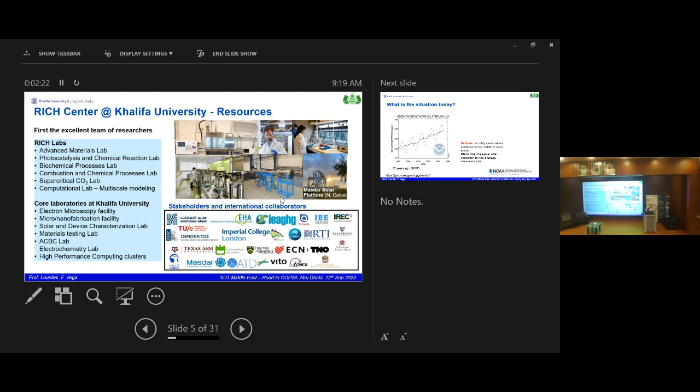In the center, we have labs that belong to the center that are actually in the building next to us over there. For next time, we can invite you to come. We also use the core labs of the university. We have some pictures of the labs that we have here, and these are some of our stakeholders and international collaborators.

This is not my last presentation. Is this the one I sent you? Okay, that's weird. I will do because I don't know what is coming. This is not the one I prepared yesterday. So let's see what we get. What is the situation today regarding - let's see if I have it later. No, really, it's not the last one. Anyway, doesn't matter, I managed with it.

Okay, so when we talk about revolutionizing the energy system, we talk about COP, we talk about all these things. In the end, what we are talking about is what do we do to mitigate climate change? One of the main issues is the bad boy of the movie, which is CO2. CO2 is not bad, it's just that we have an excess of CO2 in the atmosphere that we need to handle. So how is the situation today regarding CO2?

This is a slide that I present in all my talks, showing the CO2 concentration in the atmosphere over a period of 5 years. The red line is the monthly mean value centered in the middle of each month, and the black line is the average per season. This is always measured in Mauna Loa.

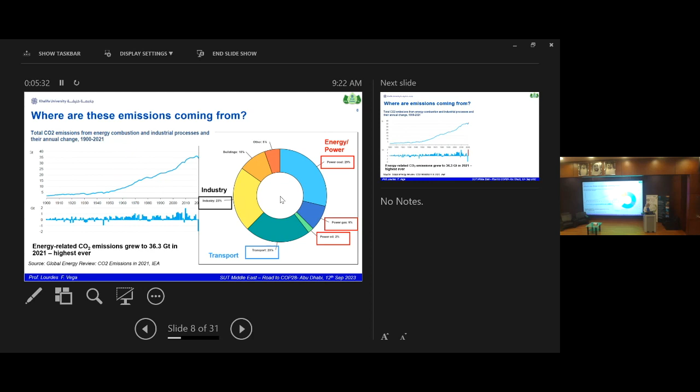You see, this is not my last slide. Anyway, that's fine.

So in the end, what we are going to talk about today and for the rest of the meeting is that we are on a planet in search of sustainable, secure, and affordable energy. This is the trilemma. We need to have this.

Maybe especially for the young people, you think that 2050 is too far away? It's not that far away. We will see that to arrive at this by 2050, there are things we need to do today, and essentially because we didn't do the things we had to do yesterday as well. So this is really very, very important.

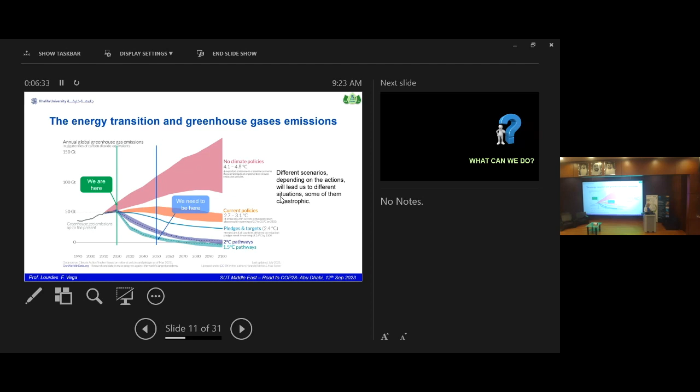So what can we do? I don't need to invent everything. Einstein already said, those who have the privilege to know have the duty to act. And this is our case. We all have this privilege. We don't need to invent any new thing.

The International Energy Agency published a beautiful report, and I'm giving you here the link, on the energy systems overview, that gives us different possibilities for tracking how we are doing. That's what I say, correct? Where are we today? Where do we need to be? Where have we been? Okay, so now I put these lines.

At least this is new from the one last week, but this is not my last version. Anyway, so what I'm going to show you here is, in all these different things, how are we doing with data, okay? So you don't have to go into the details of the data. What you have to do is look at the trends and see if we are arriving where we have to arrive.

And because I said 2050 is far away, let's look at 2030. 2030 is 7 years from now, almost 6 years from now. So let's see how we are doing.

So these are the contributions to the clean energy revolution. The first thing we need to do is energy efficiency. This is how we have been doing. The line shows the trend, and this is where we have to be in 2030 to reach what we have to reach by 2050.

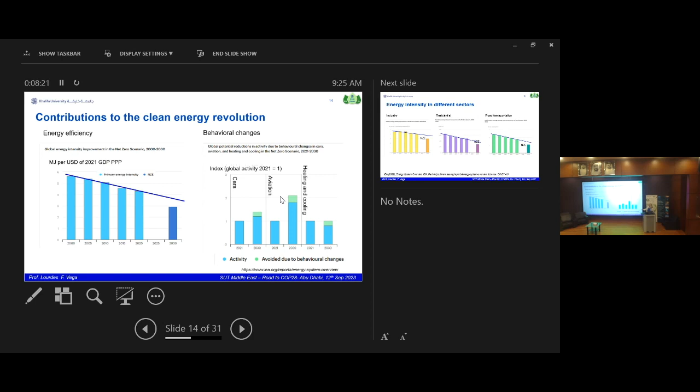I like the second one because it's in the hands of everyone: behavioral changes. Here we have three: cars, aviation, and heating and cooling. In blue you have the activities, and in green you have what is avoided due to behavioral changes. One means the activities in 2021. So we can see that it's actually growing, and the contribution from behavior is very small, to tell the truth.

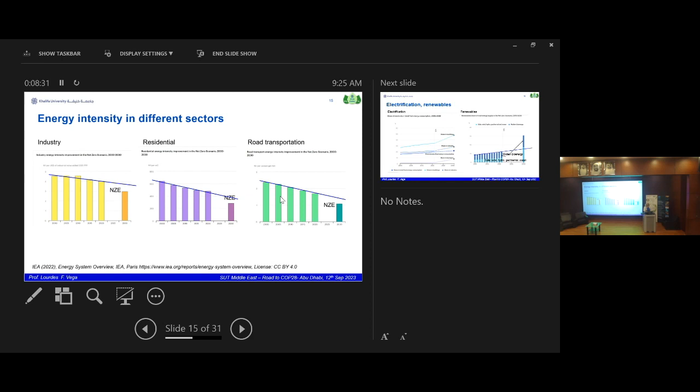Others, so we have here industry, residential, and road transportation. You have the lines, and you see that we are not hitting them. We are doing okay, it looks, but we are not hitting that.

Electrification and renewables, two of the topics we have today. In electrification, we are growing, of course, in buildings, also in industry, a little bit more in transportation.

On renewables, my God, this is the trend we have in renewables. We think we are investing in renewables. We need to invest much, much more. For this, we need to have more efficiency and also lower cost, of course, and energy management, as we will talk about later.

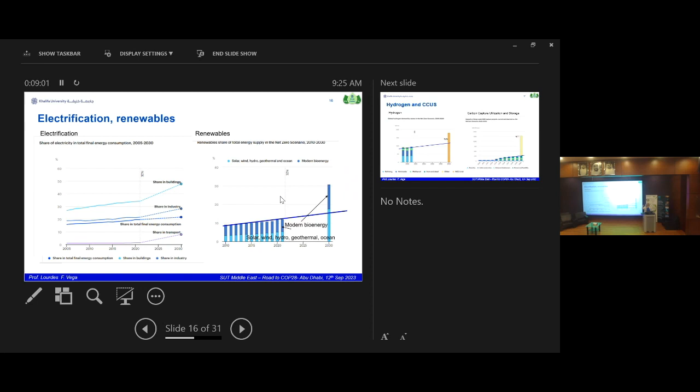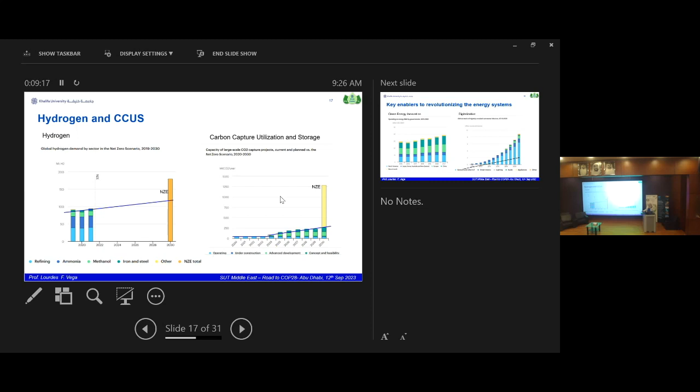How are we doing in hydrogen and CO2 capture, the ones that we work on at RICH? Not very good, as you can see. In CO2 capture, actually there are two trends. This is where we were until this year. This is the new trend, which is really growing, but we need to do much more to achieve net zero.

And then we have other systems like clean energy innovation. Digitalization is helping us a lot. But if I put traffic lights on this, no one is green today. Some of them are yellow, some of them are red. The ones in red are the ones we need to work on more.

That goes to the report by IRENA that gives us 6 technological avenues for the energy transition that will allow us to reduce emissions by 2050. These are renewables energies, 25%; efficiency, 25%; electrification, 20%; hydrogen, 10%; and the remaining 20% by CCUS from biomass or fossil fuels. So the topics we are addressing today in the workshop are all relevant to these 6 avenues that we need.

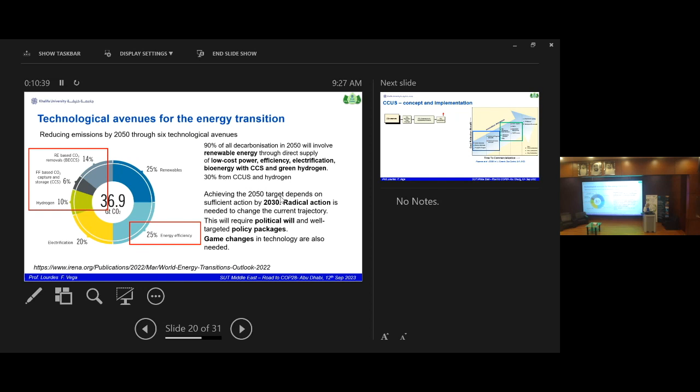It's clear that we need to work on low cost power, efficiency, electrification, bioenergy, hydrogen, etc. This means we need to take radical actions, as I showed you, and also requires political will to help. We have COP28 around the corner. We hope they come with commitments that we follow this path, and also technological changes. So the new people here, young generations, there is room for all of us to work on this.

If we talk about CCUS, this is distracting because I had another talk, but anyway, when we talk about CCUS, we are talking not only about capture, where we see different technologies that can help reduce the cost of CO2 capture and the time to commercialization. These are the ones we can do right now, but the cost reduction is very small. These are the ones we can work on, and the cost reduction is a little bit bigger. But in addition to CO2 capture, we also need to purify it, transport it, and store it, which is one of the talks we will also discuss today.

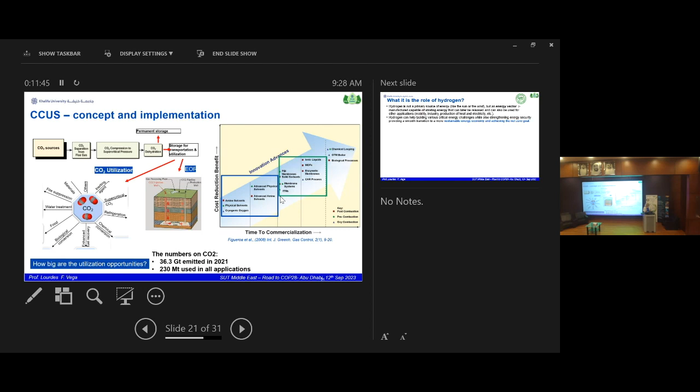But why don't we utilize it? It's much nicer. I wrote a book about this in 2010, and it's really much more attractive, but we have to be realistic. What are the numbers? I say the total CO2 emitted was 36.3 gigatons in 2021, and the applications, including enhanced oil recovery, was 230 megatons. So this is 0.6% of the total. So even if we work on it, we still have a long way to go, and we will need to store the CO2. And of course, we also need to work on renewables, energy efficiency, etc., to cover all the different things.

So where can hydrogen help? Hydrogen is not a primary source of energy like wind, that we will talk about later, or sun. So hydrogen, we need to produce it. It's called an energy vector. But the beauty of hydrogen is that it allows us to store energy. So it's a very nice combination when you have this with renewable energies. And in fact, this is the paradigm of hydrogen today. I have been working on hydrogen for 25 years. The hydrogen that we were working on was for transportation, for refineries, for fertilizers, how to improve the efficiency of the processes, etc. Now hydrogen can be used for other things as well in the context of clean energy. And this is the revolution.

So where can hydrogen help? Hydrogen can be used if we have an excess of renewable energy. Then we break the water molecule, we produce hydrogen and oxygen, and then we use this hydrogen when there is a deficit, when we don't have enough renewable energy, for example. And once we have the hydrogen, it can be used for many applications that we will see later: transportation, steel making, cement, etc.

How is hydrogen produced today? My students can answer this. Today, most hydrogen is produced by steam methane reforming. That means methane, a fossil fuel, plus water, and then we produce hydrogen and emit CO2 into the atmosphere. That's called gray hydrogen. 1 ton of hydrogen produces 10 tons of CO2. So that means it's a huge impact. And that's why we talk about blue hydrogen. But anyway, we are now working very hard on moving to other technologies that have a lower carbon footprint.

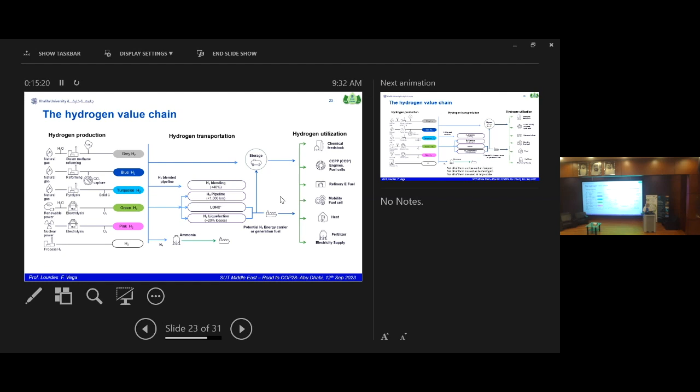Hydrogen is a very light molecule, so it requires a lot of energy and low temperature to transport it as a compressed liquid. We can also use hydrogen carriers or different options. We can convert the hydrogen into ammonia, transport the ammonia, and then crack it again to recover our hydrogen. Once we have the hydrogen, we can utilize it for classical applications like refinery, fertilizers, and chemicals for producing methanol, but also for other applications like energy storage, combined heat and power, and heavy transportation.

Not all these technologies are mature. Not all of them are low carbon - for example, gray hydrogen is not low carbon - and not all of them are used at large scale. That's why we need to move toward what we call the hydrogen economy.

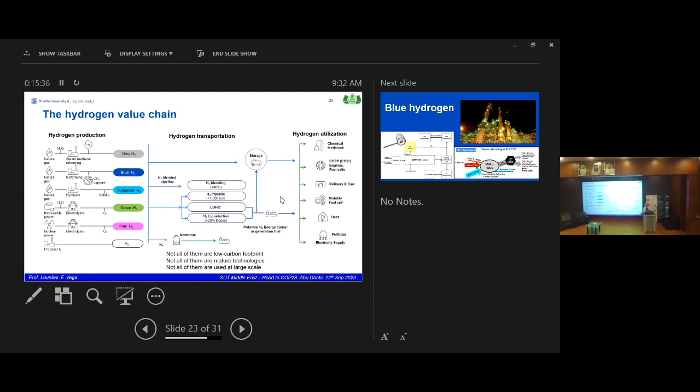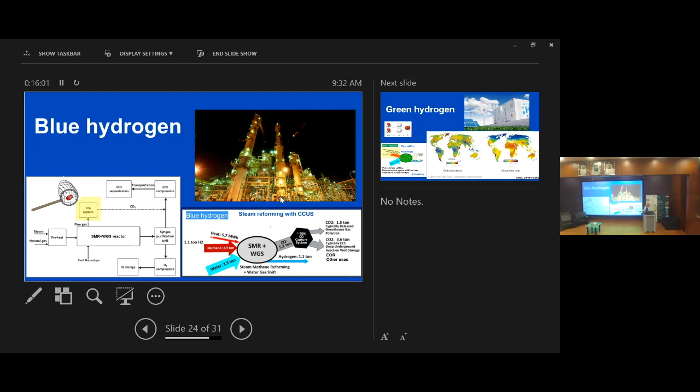So what is blue hydrogen? I already mentioned what blue hydrogen is. This is, for the engineers, a mass and energy balance on how to produce blue hydrogen. We have here the amount of heat, water, and methane we need, then the reaction, and then we get the hydrogen. This is all based on 1 ton of hydrogen, and this is the CO2 we recover. We don't put 100% because we are scaling over 1 ton of hydrogen. We can do the calculations in a different way.

What about green hydrogen? Green hydrogen is produced by electrolysis. It could be produced by other ways too, and it requires double the amount of water compared to blue hydrogen, and 5 to 7 times the amount of energy. So this is the problem - we require a lot of energy to produce hydrogen.

That means we need low cost renewables. We are in the right place for everything - we have oil and gas, we have sun, we have low cost solar, etc. This is very good, but again, solar is intermittent, so we need to see how we combine that.

We need fresh water - that could be an issue for the UAE. We don't have water, and we use the water for other needs. But still, we can work on going around all these issues and have very good opportunities for green hydrogen. That's why we have green and blue hydrogen.

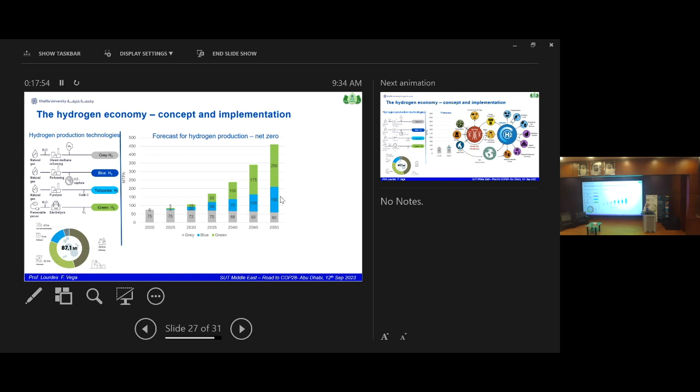And it's because of the applications we have. But we expect to see growth with new applications, especially heavy transportation and synthetic fuels, to decarbonize the hard-to-abate sectors like heavy transportation, including aviation and maritime, ammonia, metal production, and heat and power. This brings us to 2 main areas regarding CO2 that we have to work on.

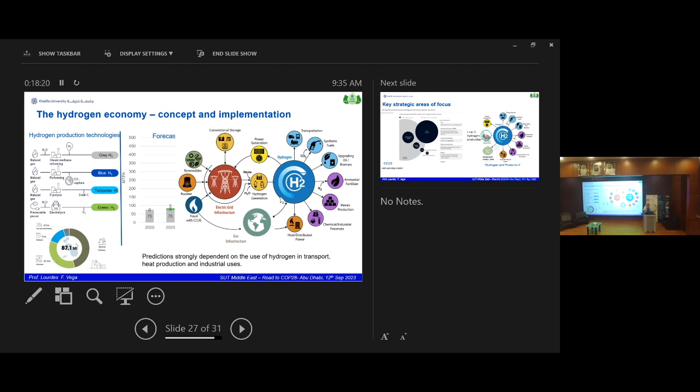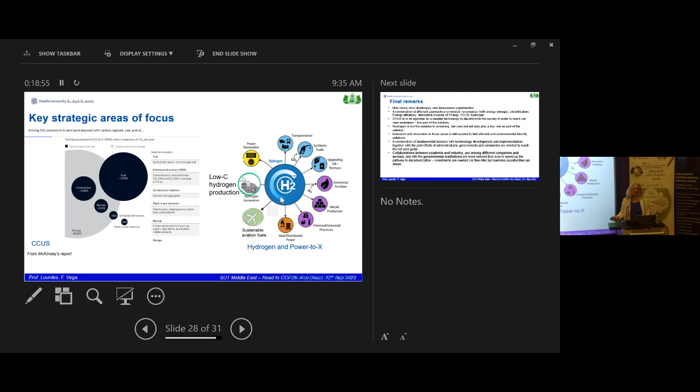For hydrogen, I already mentioned it. So, the final remarks: these are new times, new challenges, and new business opportunities for all of us. This is a challenge, but it's really an opportunity - an opportunity for developing new technologies, and an opportunity for taking old technologies and putting them into different applications, working with the final users and with universities.

So we need, for sure, different combinations. We need to have renewables with energy storage. We need to have electrification. We need to have energy efficiency and alternative sources of energy.

I didn't talk about waste to energy. This is very important. Bioenergy, including waste, is one of the main areas in which we are moving for producing electricity and power. Research and innovation is clearly needed. We need to find more efficient processes, environmentally friendly and affordable. We need to combine fundamental science with technology development and implementation.

Let me give you some numbers. The breakthroughs will come from fundamental science, and that's why we need to collaborate, all of us together. So joint efforts with administrations, governments, and companies—we need to work together, but believe me, we need to invest. There is no free ride. What we invest today will show up in the future. And the future is here.

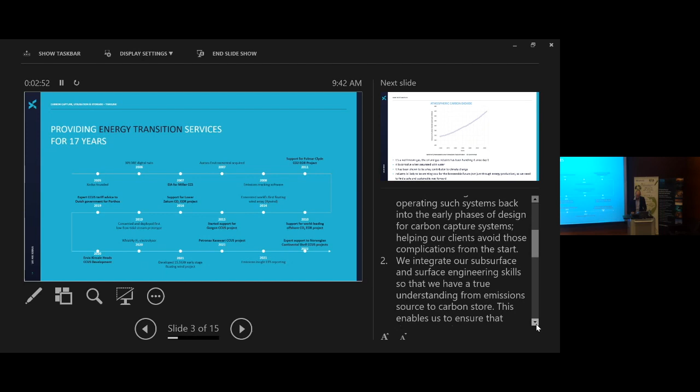So I'll give you a little context. We've been doing this for many years, over a decade. We did our first CCUS project in 2011. Xodus is one of a limited number of companies globally with experience actually operating industrial scale CCUS storage systems. This has allowed us to bring lessons learned from the early days into the early phase design of the projects we're now looking at, which is super important for making these projects more successful and, more importantly, economic.

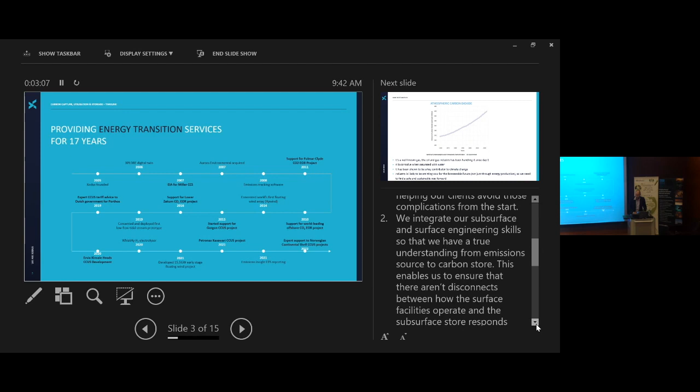We've got that integrated subsurface and surface approach, and I'll touch on that later. One of the biggest challenges we have in the CCUS space is around the uncertainty and monitoring of what happens to that CO2 when we inject it into a store.

So what is CO2? Firstly, it's nothing new. It's a gas we've been dealing with in the upstream industry since day one, so we've got a pretty good understanding of it. It's corrosive when saturated with water, which is an issue in an underwater scenario, but as we'll find out, there are solutions.

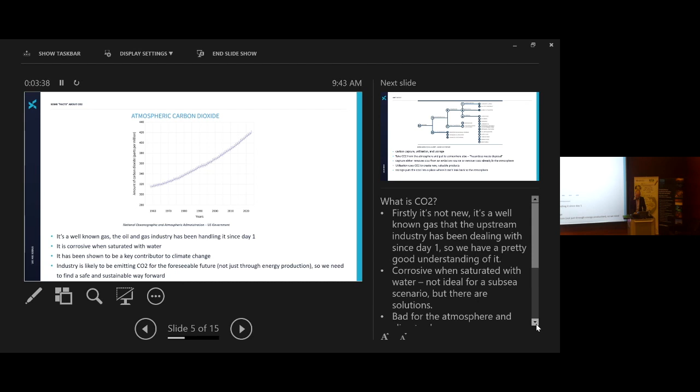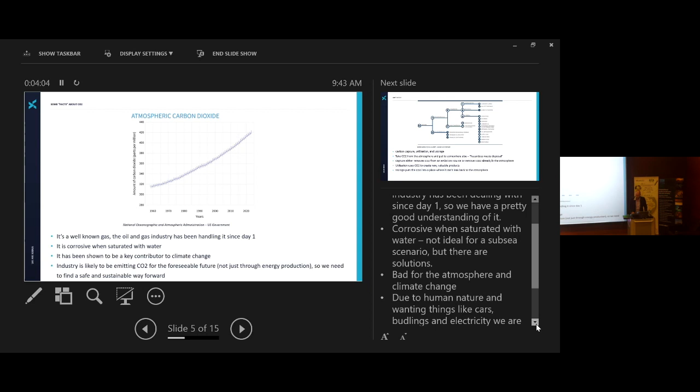It's pretty clear that CO2 is bad for the atmosphere, that's a well-known fact. Due to human nature and the things we want and need in terms of energy and infrastructure, we're going to be producing CO2 for the foreseeable future. So we really need to find a way to sustainably continue to develop, but dispose of this nasty gas appropriately and economically.

For those not familiar with CCUS, I'll give a very brief overview. It's pretty self-explanatory: taking CO2 from the atmosphere and putting it somewhere else where it doesn't escape. Another name we could have given it is hazardous waste disposal, but that doesn't have such a good ring to it when you're trying to get investment.

The capturing refers to collecting the CO2 at atmosphere, or from the atmosphere, or directly from an emission source. Utilizing simply means using that captured CO2 to create more valuable products, such as fertilizers and other useful chemicals. And storage does what it says on the tin, putting it somewhere where it hopefully stays for good.

Now I wanted to give a bit of context as to why CCS is important. Professor Vega touched on a lot of these numbers, and I hope they match up fairly closely to hers. But for starters, CCUS/CCS is widely considered to have quite a large impact in arresting the current emissions position, so it's quite important for the climate change situation we're in.

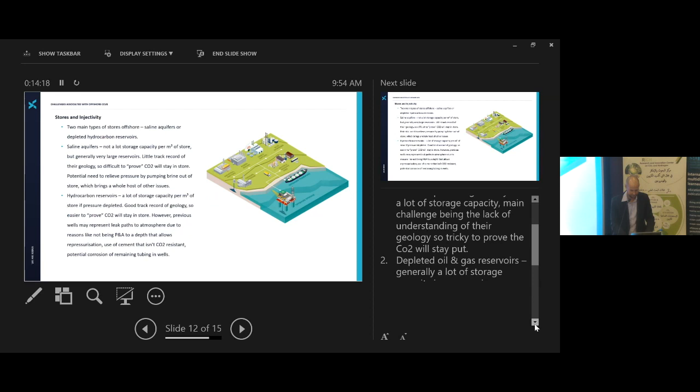In terms of the stores and the injectivity, the stores remain the same, whether it's onshore or offshore. We've generally got two types of store in the CO2 storage space, and that is saline aquifers, which generally have a lot of storage capacity, but the main challenge is the lack of understanding of their geology. And that makes it tricky to prove that the CO2 will stay where we put it.

The other option is depleted oil and gas reservoirs. Generally these have got a lot of storage capacity when the reservoir is pressure depleted. And we understand the subsurface elements of these reservoirs in much more detail because we've been producing oil and gas out of them for some time now. However, with existing reservoirs, we have the problem of existing wells and infrastructure presenting potential leak paths, and that makes the whole operation all the more tricky, especially when you have a field where previous operations haven't taken into consideration using CO2 resistant cement, for instance, or the poor plugging and abandonment of previous wells.

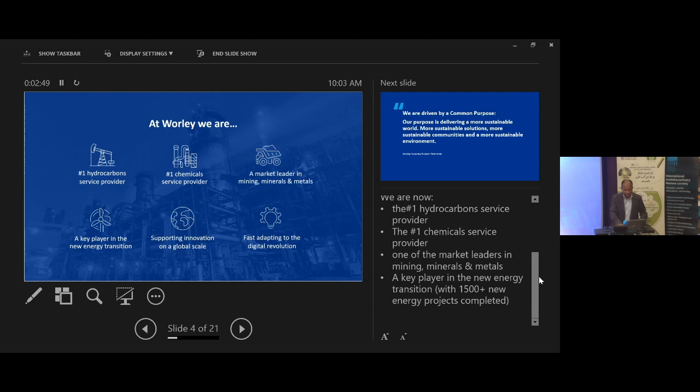Just a quick introduction to who we are. Worley is a leading engineering consultant. We do early stage feasibility studies right through to front-end engineering design, all the way through to EPCM models - engineering, procurement, construction, management type models. We're number one in hydrocarbon services, in chemical services, and we're also doing a lot of work in renewable energy, with over 1,500 projects completed to date. We're driven by a common purpose: delivering a more sustainable world, more sustainable solutions, more sustainable communities, and a more sustainable environment. Something else we're really proud of - we have over 50,000 people across 49 countries, spread across 250 locations, so there's always a person with the right skills and experience to speak to.

So just an overview of offshore wind. This is a quote from the International Energy Agency Director, Mr. Fatih Birol. He says that offshore wind's potential is near limitless - improved technology and steep cost reductions are putting more and more of that potential within our reach. We believe that the need for affordable low carbon technology is greater than ever, and offshore wind is definitely one of the tools. It's been identified as one of the big three in energy scenarios, projected alongside onshore wind and solar PV to be one of the main sources of electricity in the global energy transition. Like onshore wind and solar, it's a form of renewable energy that's clean, cheap, and reliable.

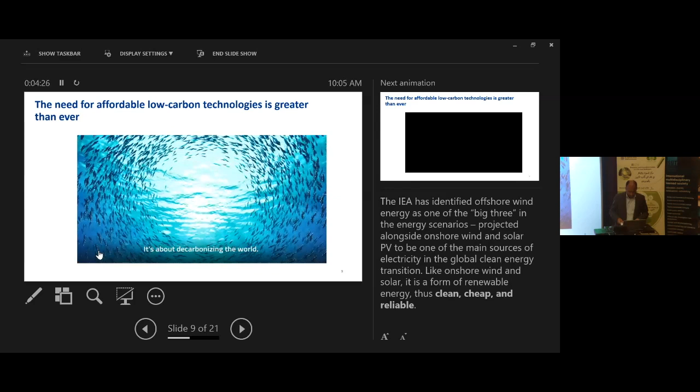It's not just about powering the grid, it's about decarbonizing the world. Everyone has an ethical decision to make about the source of their energy, and the biggest changes can only come from within. Companies that work in carbon-intensive industries have a responsibility to lead the way in building a net zero future. And the race is on to get more offshore wind farms up and running safely.

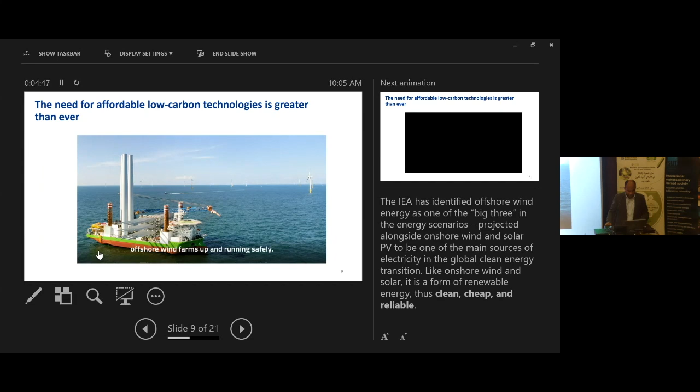As wind markets emerge in new geographies, the industry depends on a workforce who are on the ground and ready to go. Experts who understand the problems and can build cost-competitive business cases to get the fixed and floating turbines energized on time.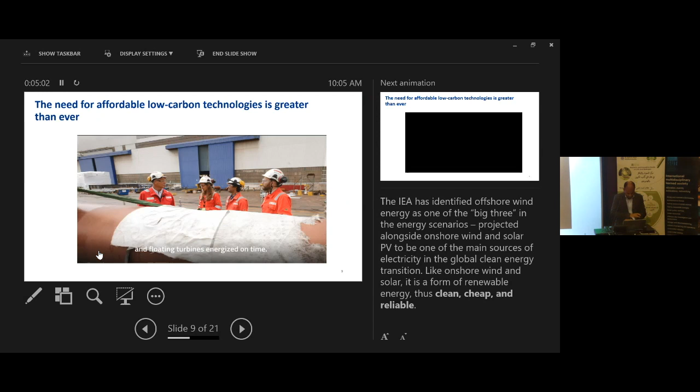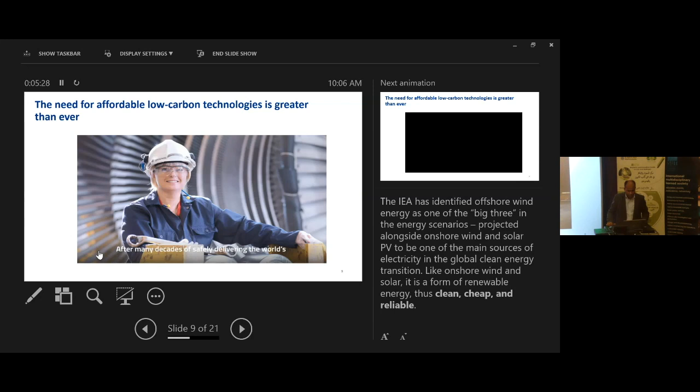But it all means nothing if the turbines don't spin. It's about applying the right digital tools and finding smarter ways to operate and maintain assets. But using offshore wind to produce electrons is only the beginning. Piecing together all the parts of the renewable energy puzzle to integrate into your operations is complex. After many decades of safely delivering the world's largest projects, for us, it's business as usual. The time is now.

So, as I said, we believe that offshore wind across the globe is one of the toolkits as part of the energy transition. The ocean winds are an inexhaustible source of renewable energy. According to the IEA, offshore wind energy could power every home and business on Earth. However, most of this potential of wind power is currently going to waste. The only way to capture it is with tens of thousands more offshore wind turbines spinning on coastlines across every continent. The world's net zero ambitions depend on making this a reality.

Produced by wind turbines installed typically in shallow waters of less than 50 meters deep, offshore wind farms are usually located in nearshore locations. Currently there's also floating wind, which is challenging the evolution of wind farms by allowing turbines to be installed much further out, benefiting from even more reliable and consistent energy.

Coastal winds - just a brief background on how energy is generated. Coastal winds help to turn wind turbine blades, spinning a shaft connected to a generator. This generator turns the kinetic energy into electricity, which is sent to substations and fed into the electricity grid or distributed to industrial users.

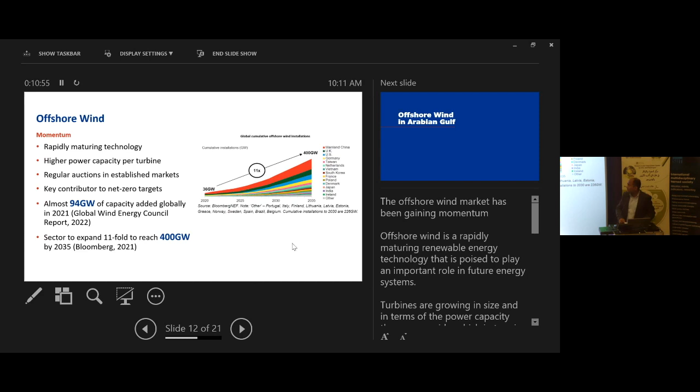In 2021, global commissioning of wind turbines reached almost 100 gigawatts for a second year running, and offshore wind additions surged almost 161% year on year. This chart shows Bloomberg's 2021 offshore wind market outlook, which foresees the sector to expand almost 11-fold to reach 400 gigawatts by 2035.

Now I'll focus more on the offshore wind potential within the Arabian Gulf market. These charts show the potential of offshore wind in the region. According to some estimates, the Arabian Gulf and the Gulf of Oman's shallow areas have an estimated 1,000 gigawatts of offshore wind energy potential, which could considerably help the region meet its renewable energy goals.

The potential of offshore wind has been investigated and studied by several countries already. For instance, the UAE is conducting feasibility studies, and I believe Saudi Arabia already has plans to construct their first offshore wind farm.

The chart on the left shows the average wind speeds in the region, and the chart on the right shows approximately wind power density. The darker areas show higher wind speeds and higher power density. These charts are from the Kuwait Institute for Scientific Research. We can see that the offshore fields just to the east of Saudi's eastern seaboard and north of Qatar have the most potential for further studies and evaluation.

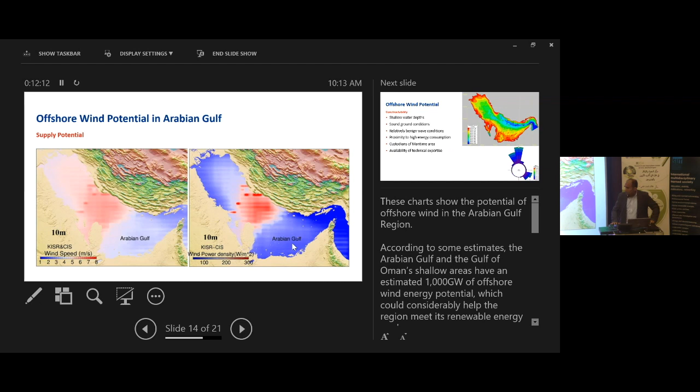In terms of constructability, here's really the advantage that the Middle East particularly has. The cost of construction of offshore wind farms is significantly driven by seabed depths, which in the Arabian Gulf region, as seen in the chart on the top right, immediately east of Saudi's eastern seaboard and north of Qatar, the nearshore water depths are typically in the range of 0 to 20 meters, and closer to shore, they range from 0 to 10 meters.

In addition, based on offshore work already undertaken for various oil and gas related projects in this region, we have a fairly good understanding of the generally favorable ground conditions, and therefore have a suite of suitable, cost-efficient foundation system solutions, which is a key driver for the overall cost of offshore wind farms.

Furthermore, in the bottom right, we can see typical wave roses for the area just off the eastern coast of Saudi Arabia. The wave conditions are relatively benign compared to some other regions, for example the North Atlantic, further simplifying the design and construction of offshore wind farms here.

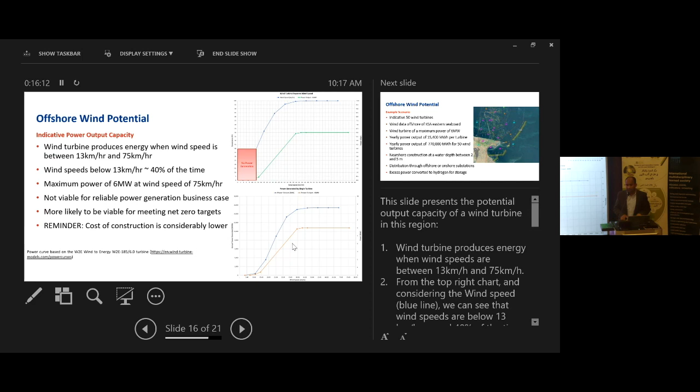So I'll give a brief example scenario of where this offshore wind could potentially be employed. This slide presents a potential example of 50 wind turbines located offshore Saudi's eastern seaboard, close to an operating oil and gas field that is a fairly high energy consumer.

It has been assumed that 50 wind turbines would have a maximum power rating of 6 megawatts, with a yearly output of 15,400 megawatt hours per single turbine and 770,000 megawatt hours for all 50 wind turbines.

The wind farm is located at nearshore depths of around 2 to 5 meters, in fairly sheltered metocean conditions. These wind farms could be constructed on dredged platforms to further reduce the cost of nearshore piling construction. The power could be distributed through offshore or onshore substations, depending on consumer requirements. Although not considered for the economic case, excess power could be stored and converted to hydrogen if required.

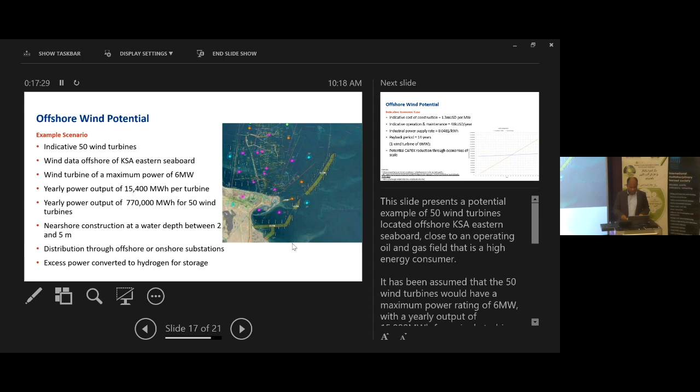This slide provides an indicative economic case for such an offshore wind farm in this region. An indicative capital expenditure cost of around 1.3 million US dollars per megawatt has been assumed, with a continuing OPEX cost of around 50,000 US dollars per year. An approximate power supply rate has been assumed based on current prices in Saudi Arabia.

Based on this analysis, as you can see from the chart on the right, the straight payback period is approximately 14 years. Please note this is a simple assessment, not considering any discounting of cash flows, equity/debt considerations, or complex financial modeling. Although there's potential for CAPEX reduction through economies of scale or lowering overall costs, the simple payback is not going to be economically exciting for anybody.

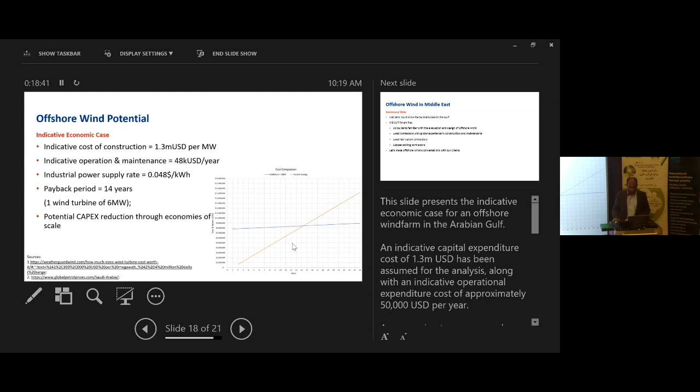However, as mentioned previously, the key here is not the economic case, but the overall objective of meeting net zero targets for the region. Offshore wind, as I said at the start, is one of the tools that can contribute to this.

So just to finish off, in summary, we've been easily dismissive of the case for offshore wind in the past, in the specific context of the Arabian Gulf region, and for very valid reasons too, some of which I've discussed.

However, net zero could drive the dynamic in some specific locations in the Gulf, specifically considering the relatively low cost in shallow nearshore and benign metocean conditions, located close to high energy consumption centers. There's the additional benefit of consultants, contractors, fabrication contractors, and subsea cabling contractors already present in the region, who have extensive understanding and experience built up over many years to develop very cost-effective solutions.

Therefore, it's an onus on all of us, when we engage with our clients, to make this part of our discussions and discuss the potential of offshore wind regularly in our conversations with them. Thank you very much, and I'll look forward to receiving your comments or any questions you might have later. Thank you.

Thank you so much, Yasser. I think what I can say is that I personally know some of the projects being conceptualized today in the Middle East region for offshore wind, so yes, it validates whatever you have shown in your slides. Thank you so much.

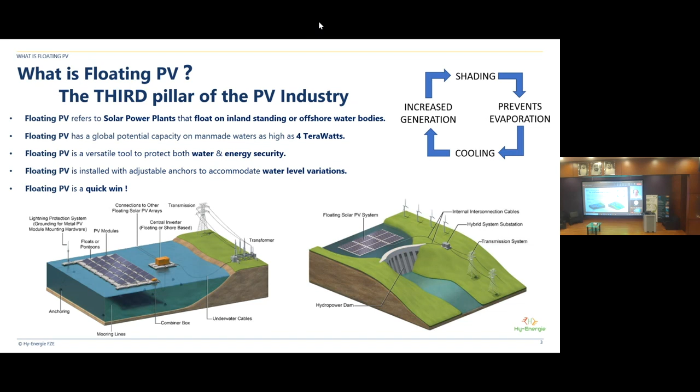I'd like to draw your attention to that engine I've put up on the top right, where floating PV systems provide shading to water, which prevents evaporation. It gives cooling to the panels, which in the Middle East is one of the major loss factors of solar, and that then reaches increased generation of the solar system.

So what does the market look like? There was a market study by IHS Markit in 2022 which forecast that the floating market would reach close to 14 gigawatts by 2026, mainly dominated by Southeast Asian countries, as you can see in the graph on the right. If you take the top 5 countries, 75% of what is being built or planned is happening in India, Indonesia, South Korea, China, and Vietnam.

It's also important to segment floating PV, you cannot put everything under one banner. On the left you see 4 segments which work at different degrees of difficulty. The easiest and currently most common way to build, in countries like Japan, Europe, and the US, is on ponds and lakes where you have very little wave action and not too much wind interaction. So it's easy and straightforward to build, not a very deep anchoring system is required, you can even anchor from shore.

A second segment is reservoirs, where you could face up to 2-meter wave height—think hydro dam reservoirs and so on. A third is near-shore areas, maybe a sheltered bay or a dock in a harbor sheltered from the ocean or sea waves. Then the fourth level, which is very new—and I'll come to that at the end of my presentation—is when you really go offshore, where you have full exposure to the elements: salt, mist, wind, ocean storms. That's the most difficult segment to address.

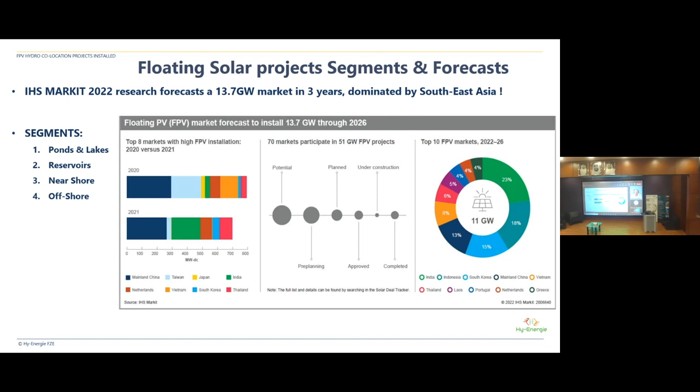Solar systems installed, floating PV systems installed—I'll show you some pictures of that. Currently we are over 5 gigawatts of floating PV systems installed worldwide, and it's growing very fast.

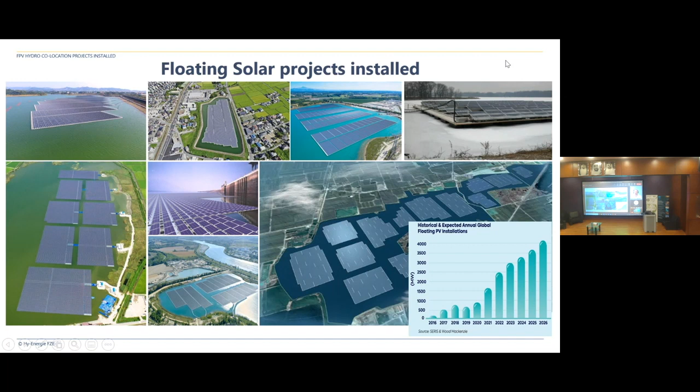Here you see more views, sheltered in a harbor, and on the top right, even in Canada, where you have freezing conditions, floating PV systems can be deployed.

So what are the advantages of floating PV systems? There are quite a lot, but the main ones are: first, you have a dual utility of the surface area, so underutilized water areas and existing infrastructure get used twice—you can use the water for irrigation ponds and at the same time generate electricity from it. Second, as I mentioned, it prevents evaporation of finite water resources, something we should really value in the MENA region because our evaporation can reach very high levels.

Third, we do not use valuable land, which can be used for other applications like real estate development or agriculture. Fourth, maybe surprising but something we should value in the Middle East, is that one of our biggest losses is the loss of performance due to heat.

However, if we can build floating PV systems over water, the cooling effect of the water can increase the performance up to 16%. That's something investors would probably value, even though floating PV systems have a slightly higher capex cost than ground mount systems.

It also reduces soiling, because working over water means less impact of soiling, so the cleaning cycles can be extended. That's actually the second largest loss factor of solar systems in the Middle East, the loss of yield due to soiling. It also prevents the growth of algae, so water quality is higher, and provides shade for fish. As I mentioned earlier, it's quite fast to deploy, faster than working on a ground mount surface.

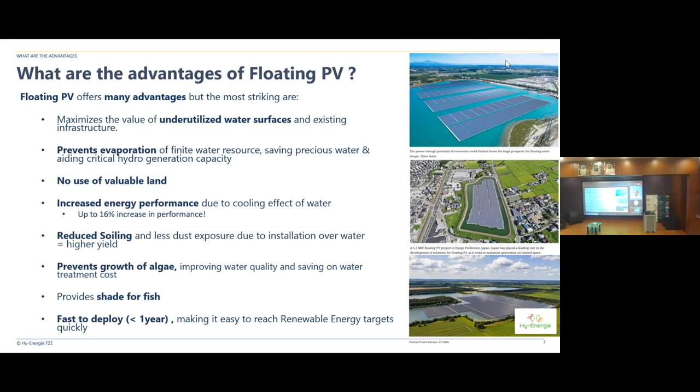I'd like to draw attention to this co-location of floating PV and hydropower. For me, this is really a no-brainer. Most of the advantages are the same as I mentioned before, but there are two I'd like to put in the limelight.

One being that if you combine a floating PV system on an existing hydro dam with existing infrastructure, you can generate your electrical requirements during the day from the solar system, basically delaying your dispatch of water until nighttime, shifting your use of water and creating a virtual battery. This resolves one of the big issues we face in the renewable world: how do we get low-cost storage? By putting floating PV combined with hydro, we have that low-cost storage.

Hydro dams also have a function in drought protection, done through management of the water. If we add floating PV, you have an additional dial for how to control that factor, which is something very much valued by municipalities.

If municipalities or governments engage in PPAs or public-private partnerships, such systems can be built at low cost. There's basically no capex; the system basically pays for itself by doing this.

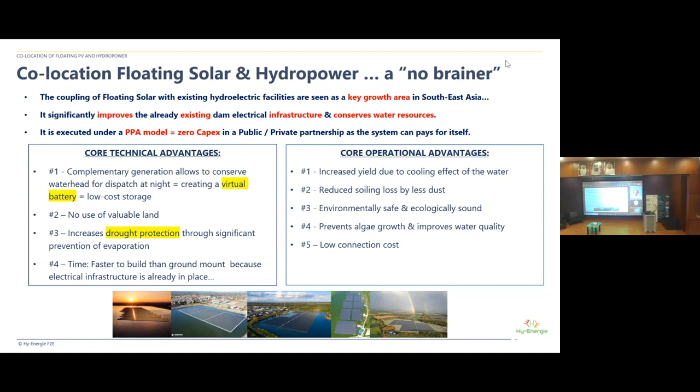Again, we see Southeast Asia as a leading area. Thailand has a large program converting quite a lot of their hydro plants to co-located systems. Here you see a list of some of these large systems. China, of course, is leading, although they did not build it as a floating system, but as a combination of fixed ground mount with a hydro setup to try out this technology. The largest one we see here is in India, the Omkareshwar reservoir, where 600 megawatts of floating is currently installed.

I also mentioned Portugal, a leading country in Europe for deploying this technology. My current employer, Masdar, has commissioned 145 megawatts in Indonesia. And then you see other large systems coming up.

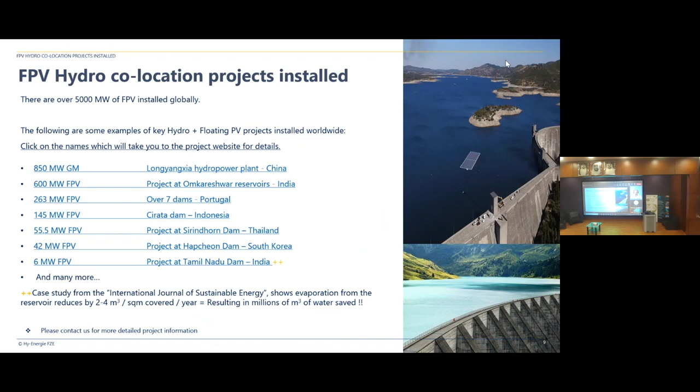Concerning the Middle East, we did a study ranking which countries would benefit most from this technology, based on priority criteria: high GHI, meaning solar irradiance hitting the surface of the Earth; whether hydropower with a reservoir is available; whether land price is high, often a big driver for floating; whether there's water saving potential; a large population; whether solar is already ingrained in the country's psyche so it doesn't need much explaining; whether funding is available, and so on.

We came to this ranking you can see on the left—our ranking, of course, open for debate—but we put Turkey in the number one spot, then Morocco, Iran, KSA, Egypt, UAE, Israel, Iraq, and so on. Again I allude to this little engine, what I call the floating PV engine, where shading prevents evaporation, provides cooling, and increases generation. It's a nice engine where working with nature instead of against it actually brings additional benefits.

Now let's look into a couple of country profiles. We've taken Iraq here—this is a country study for Iraq on floating PV. It only ranked number 8 on our list, but if you look into detail at Iraq, you'll find they have 37 dams in the country, 5 of which are major hydroelectric power stations with almost 2.4 gigawatts of generation capacity.

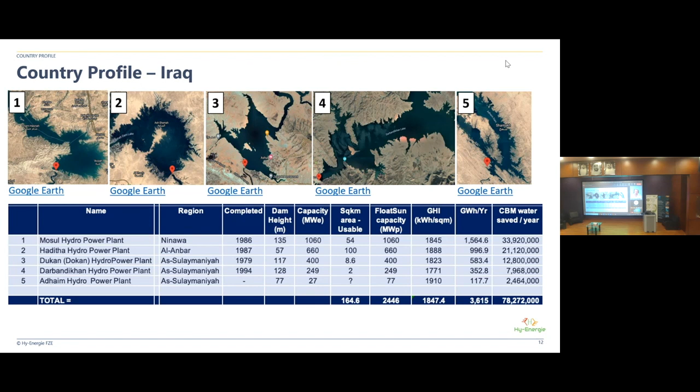Here you see a picture of those dams. Often they are very large water bodies, 20, 30, 40 square kilometers of area. So the floating system that is installed would not even take that much space from that water body.

The second study we've done is for the country of Morocco. Morocco is a country with quite a lot of dams, over 139 dams and an additional 57 under construction. They have a major issue on water scarcity also, because the groundwaters that are being pumped out for irrigation for the agriculture are not getting replenished.

So there is quite some loss from those dams, which amounts to 70 million cubic meters per year. As I mentioned, we could avoid that by deploying floating PV systems.

However, if we study the top 5 dams, a total of 1.2 gigawatts of solar can be achieved, reaching almost 2 terawatt hours of electricity, and would save 38 million cubic meters of water from evaporation. As you can see, that's almost half of what is currently being lost from evaporation, just by covering areas of those dams with floating PV.

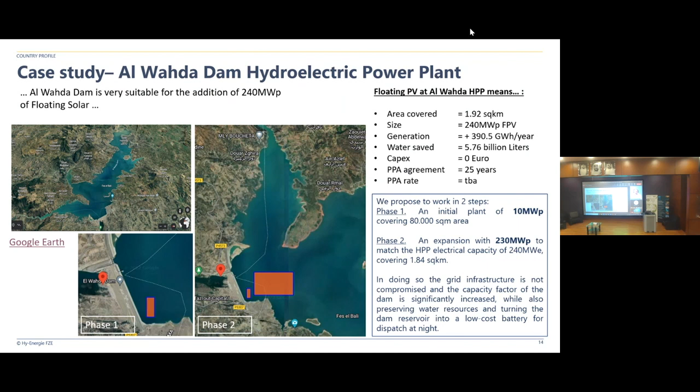Here is a picture. As you can see, this dam's reservoir is covering a massive area. On the bottom left, phase 1, you see a 10 megawatt pilot built close to the dam, close to existing infrastructure, so with low connection cost. And in phase 2, if you would extend that with 230 megawatts, you can see the area it takes from the reservoir surface is really not that much. It's basically also providing this dam with additional storage capacity for dispatching power to the surrounding areas.

Good, now let's dive into this 4th segment, what I mentioned, when you go really offshore. There's a company in Holland, the Netherlands, called SolarDuck, quite innovative and recently formed as a spin-off from a shipyard, which is focusing on pure offshore floating systems.

And this is, of course, fueled by the strong macro trends that we've seen, the growth of renewable energy power demand, the fact that solar is critical to meet this increased demand, because of course we're building a lot of solar, but also the demand is increasing almost faster than the rate at which we can build it.

IEA had made a study showing that if you want to be on track by 2050, we would need annual capacities of solar to reach 630 gigawatts by 2030. Currently, we're close to 200 gigawatts per year being built, so still a factor of 3 to be increased.

It was also brought up by one of the previous speakers that most of the population is in coastal areas, which is helping the development of floating PV, offshore PV. Floating is offering this new frontier, basically creating a new asset class that can be explored.

SolarDuck has developed this innovative model where you have modular units that click together into building these offshore solar plants. They're robust, scalable, quite easy to install, efficient on the O&M because of the concentration that you have, and they have minimal impact on the environment, barely taking up any space of the ocean bodies. One nut still to crack is the competitive LCOE.

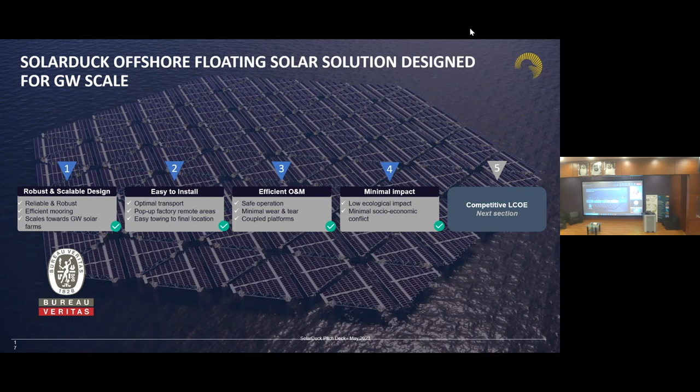That will come by increasing the scale, since it's still an early-phase company. They shared with us a view of their pipeline, which reaches 3.3 gigawatts, but the company was only formed in 2020.

Only 2 years back, a full-scale demonstrator was launched, and a big milestone was that the large German utility RWE engaged with them in a partnership for launching a 0.5 megawatt demonstrator in the North Sea. This development will continue, so we're following it very closely.

It's one of the most innovative ways of bringing solar to offshore areas, and you could think of coupling these platforms with existing wind power infrastructure, sharing this infrastructure over the two technologies. This is a view of their pipeline that they're currently working on.

Japan, as one of the leading, first-moving countries in floating PV, is also engaging on this. Closer to home, we have in Qatar some studies going on to see how that can be deployed.

I'd like to leave you with some of my favorite aunt's Flemish wisdom. She mentioned to me once that there are people that see things happen, people that make things happen, and people that sometimes get a whack over the head and say, what did just happen? I hope we can all engage on these new technologies and actually make it happen. Thank you very much for your attention.

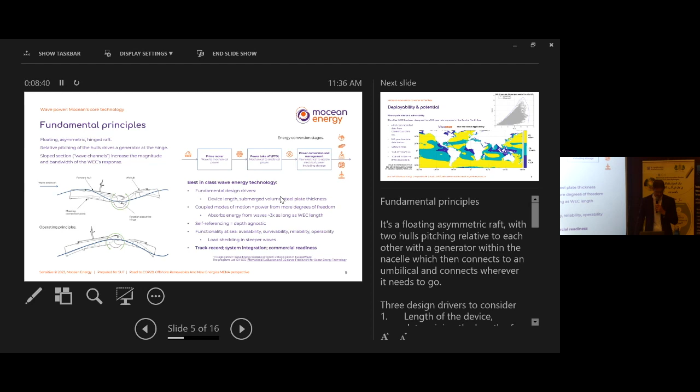Finally, the track record — we've been demonstrating through stringent testing, integrating with partners. I'm going to show you an example of what that integrating with partners looks like, to demonstrate the commercial readiness of the product itself.

Deployability and potential. So when we consider deployability and where we can deploy around the globe, there are a number of considerations. Not all of them are considered at this point, but there are a number we take into consideration — two, for example, are power potential and survivability.

On the main graph here, in the center, you see the capacity factor — how much power can be available from a 20 kilowatt rated machine. Our first commercial machine is the 20 kilowatt rated machine, and to give you an example, that can handle power requirements for a 4 to 8 well subsea tieback, for example.

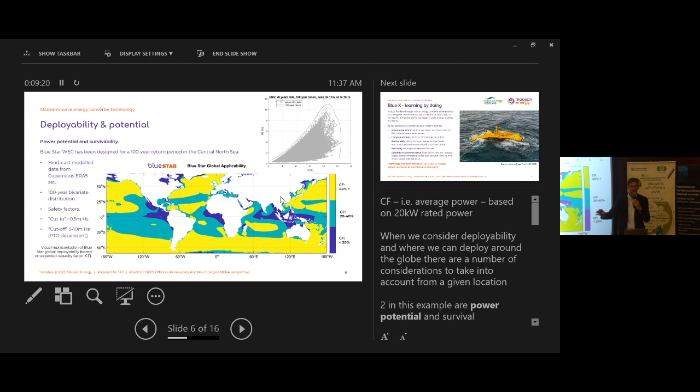Then the graph on the top right shows a scatter diagram over a period of time and what sort of waves, or power from waves, we can get in terms of significant height and period. What we look at then is the worst case 100-year return period contour around the plot, and then we test the machine in those seas at scale and check the survival parameters.

This is a really important part of the process when we're looking at where the system can be deployed and in what environment. For example, we want to check the machine hull — when you have these super large waves, you want to make sure the machine doesn't come back and hit itself. So it's really important to understand what conditions the wave converter is going to be involved in.

As you can also see in the wind sector, we have what we call cut-in and cut-off conditions. However, in wave it's much more two-dimensional — we have to consider the wind, but also a wide range of conditions, so that's not easy to define. In this case, you can think of it as significant wave height and period, which we consider as steepness, and we cover a wide range of operational envelopes. So it's very broad for us — I guess a lot of the 80-20 rule can apply to that.

The key thing about the technology is it automatically, passively, can disconnect the PTO, which drives a lot of the forces that you would see on the wave converter when it's going over these waves. But ultimately, when it comes to these worst case conditions, it can passively disconnect itself.

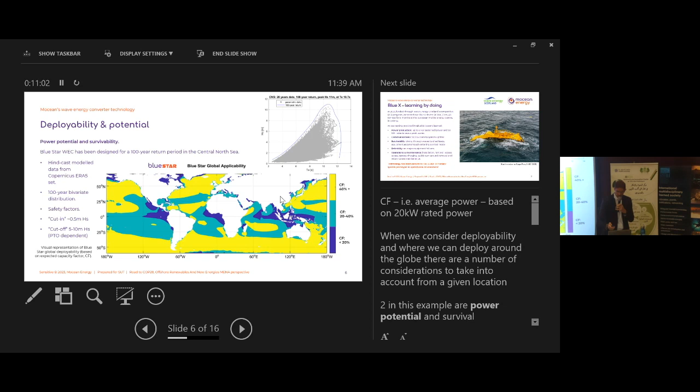If we look at the Blue X, this is our prototype, and we're going commercial with this product. It was the culmination of a competitive pre-competitive procurement program run by Wave Energy Scotland. We tested our machine in 2021, and were awarded a contract to build the prototype. You can see in the picture here the Blue X machine itself, in a test facility back in 2021.

You can see it's 2 hulls that rotate about the hinge, which drives a generator. Testing went on for 4 months at sea, and we weren't connected to anything at that point — we just wanted to validate the equipment. Since then, we have a project ongoing where we are connected to a piece of equipment. Those waves we can see here have a significant wave height of around 2.1 meters.

By design, the machine dives through the waves itself, much like a surfer would go out from the breakwater. It actually dives through the waves, protecting it, so we don't have this kind of slamming load you'd see with a vessel coming over the top of a wave and then cresting. By design, it's meant to dive through the wave itself, so you can see all the green water, blue water coming over the top of the machine. By design, it's meant to do that.

So the Renewables for Subsea Power project — this is one of the projects I was mentioning. It's a really important project about collaboration, bringing different partners into the industry to understand how we can provide technology focused on decarbonisation. This is what we call a flagship project within the Net Zero Technology Centre in the UK. It's a first-of-a-kind full-scale system providing power and communications offshore.

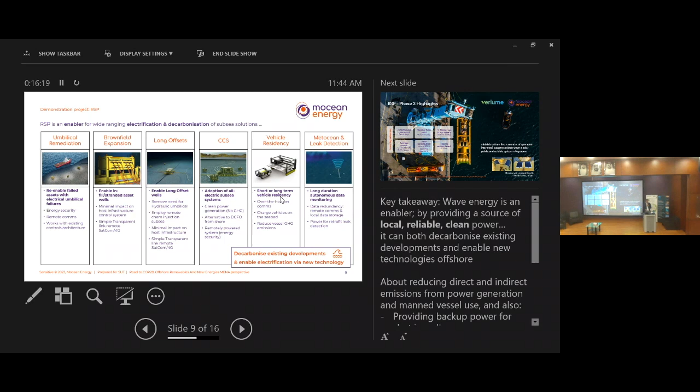Very quickly, some of the highlights. You can see from the picture here this was deployed - I'll talk a little bit about the solar aspect. This has been one of the key learnings for us. We talked about combining technologies, renewable energy sources together, and that's a key indicator and one of our key learnings. As you can see from the bottom right, we have some solar panels on the deck - very small, around 500 watts, two on the forward hull and two on the back hull. It's been a big key learning.

One of the things we noticed during the testing period is the solar contribution provides at least 200% of the comms requirement for this system, so 100% of that can potentially be exportable down to whatever we're connected to, which is key to understand. So utilizing those periods where the wave energy potential is not so high, you can actually extract from the solar and utilize that as well. When you aggregate those up, you can actually double them.

It's quite significant. This was an example around a 5-meter significant wave height - a really tough environment. One thing to remember is the stability of the machine: there's not much pitch and roll, which is really important because you have the antenna, and the antenna is the communication gateway to the subsea equipment below. So it's very stable within its environment.

Very quickly, I want to show you a bit of video here. You can see this was the subsea battery pack system stored on the seabed, and this was the AUV - we've done something like 50 docks and undocks from the AUV. It's been very successful, and it's got about 6 HD cameras with 4K video capability. You can see here where it's docking in and out of its docking station.

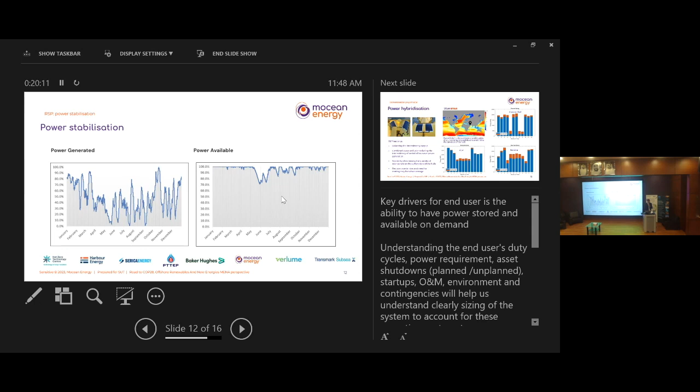So I just want to talk a little bit about this power hybridization. We talked a little bit about it today as well, in terms of combining renewable energy, and I think this is a really key important part. On the top left, you'll see some.

We have an array of solar panels, as I mentioned - two on the forward hull and two on the rear one, which is about 500 watts. What we noticed during the RSP project is there's some amazing results that can not only sustain the comms, but we can also use this energy to export to the battery system or whatever we're connected to, thus improving the power export and reducing intermittencies during low wave power generation periods, which many parts of the world experience.

And then we have to figure out how we're potentially going to replenish that power the battery storage has been drawing from. So for example, by 10 o'clock, we observed that the batteries were full on board the wave energy converter, and that potential excess energy could be exported down into a commercial opportunity, for example, which we're looking at doing.

So by scaling this array on the decks - and we have quite a lot of real estate on top of the wave energy converter - we could put something like 3 to 4 kilowatts of additional solar panels on top. If we start to aggregate that, it would give us much more power that we could deliver to the end use. That's really important in those regions where both can be harvested, potentially reducing intermittency.

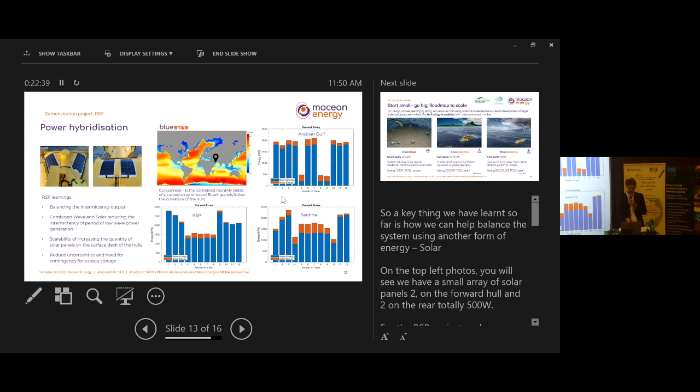So I mentioned earlier in my presentation: start small, go big. This is really important in terms of how we were successful as a company, and where we go from here. So start small - we go from tens of kilowatts on the left-hand side here, focused on DC tiebacks, subsea wells, resident robotics, marine awareness, really important.

And then we start scaling up to the hundreds of kilowatts. One of the key things - we announced last week at Offshore Europe that we won a 3.8 million euro award from the EU, to go towards developing the next size of the machine, which is really important. And then that will be a natural progression as we go up to the megawatt size scale.

One of the key things we fundamentally believe is that coupling marine renewable energies with other energy sources - and we've seen examples of this with the previous presenters today - really helps with intermittency.

So you can imagine, these wind turbines, there's something like 1 to 2 kilometers in between them. If you start talking about the really large ones, all of that real estate could potentially be infilled with wave energy converters, solar panels, and things like that, which can then be exported down the same export line. The thing is, the period where the waves are generated, where the wind is generated, and where the solar is, they're all out of sequence with each other. So having those potential energy sources coming together reduces that intermittency, which we're all trying to achieve. And of course, that's part of the roadmap going forward.

One of the key other things to mention, as the previous presenters mentioned, in recent awards back in the UK in terms of renewable energies, wind actually wasn't awarded anything in terms of fixed platform wind, for example. One of the key things was that tidal was actually awarded 5 times more than the planned award was probably going to give it. So it's interesting that from an ocean energy perspective, there's a huge focus now on how we can deliver that with the technology that's coming available quite soon.

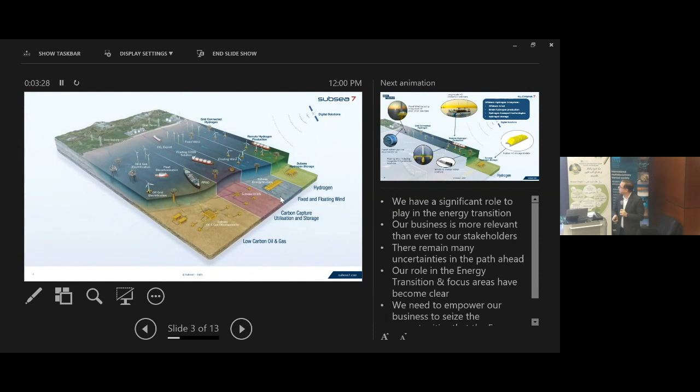So taking the last section out of these 4 segments that we work in, offshore hydrogen ecosystem - let's talk about what is involved in an offshore hydrogen ecosystem. It's the green hydrogen production, first of all. Now there are various ways of producing green hydrogen offshore. It could be through offshore wind installations, decentralized offshore wind installations, where you have the hydrogen production systems, which is electrolyzers, as Professor Vega earlier explained, as one of the methods of producing green hydrogen, to be installed on the facilities itself, on the platforms itself, and produce hydrogen. Or it could be the large-scale hydrogen production systems like FHPU, floating hydrogen production units.

We all know about, we're all accustomed to the oil and gas industry. We know FPSOs, floating production, storage and offloading units. So these are similar to those systems, but for the hydrogen. So these are the centralized hydrogen production systems, which could be used for generating the green hydrogen.

The next segment is the transportation. Now the transportation could be through the various pipelines that we are already using in the oil and gas industry, but with a different view now in terms of modifying the technology, the material composition to cater for the different set of molecules now, which is the hydrogen. So the technology exists, which is transferable with certain modifications in the metallurgy of these pipelines. The third one is the storage.

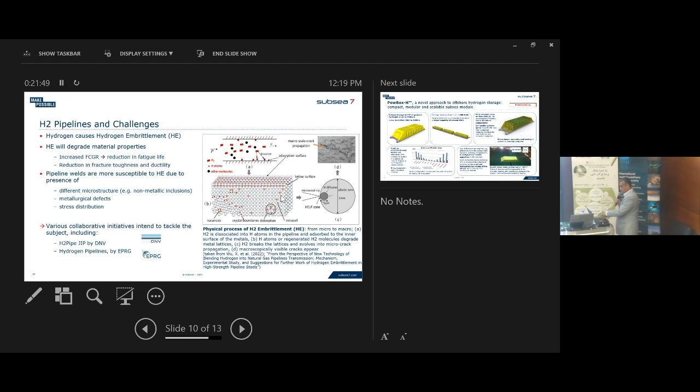So here we are taking a novel approach to offshore hydrogen storage, looking at a compact, modular, and scalable subsea module. This is one of the patents that are pending by Subsea 7, which is PowerBox-H2.

These are individual modules or units which allow for subsea storage of around 15 tons of gaseous hydrogen at up to 350 bar at a range of water depth up to 1,500 meters. What that translates to in terms of power storage capacity is around 500 megawatt hours per unit.

Of course, there's also the option of linking up multiple modules to increase the capacity of storage.

With this design, here again, it's clear that a lot of the technology we already have can be transferred, and this is a good example. We are utilizing mature components, nothing specifically dedicated for this particular unit.

So we have very compact, easy to manufacture units using composite cylinder tanks, which are not difficult to find, type 4 PE liner and fiber wrapping, which also reduces the need for maintenance and also the effect of corrosion.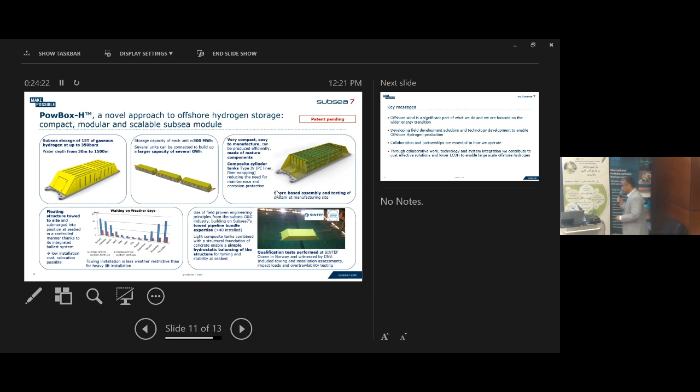Right, so onto my last slide, just key messages and takeaways. The more I hear all the other speakers, you realize that actually we all have similar messages in terms of collaboration within the industry in order to get things rolling a bit faster.

So offshore wind is a significant part already of what we do, and we are focused more on the wider energy transition. So developing field development solutions and technology development to enable offshore hydrogen production is in essence what we are all doing. Collaboration and partnerships are essential to how we operate.

Here again, common message through all the presentations: through collaborative work, technology and system integration, we contribute to a lower LCOH to enable large-scale offshore hydrogen. Again, back to what Ashish was mentioning on scalability in order for the cost to be lowered.